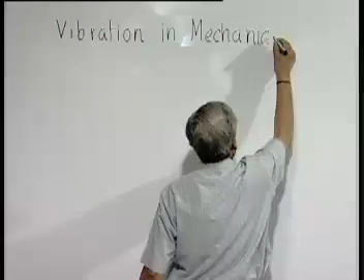Now you may ask why it is necessary for us to study this fluctuating or vibratory motion, because we have more or less taken care of the various dynamic effects and only some residual amount is left. So let us first establish why it is so important to study the dynamic characteristics of mechanical systems, or vibrations in mechanical systems.

Let us consider a particular case, say a simple cantilever beam. It has a length L and cross-sectional area B by H, where H is the thickness and B is the width. And this is subjected to a static force.

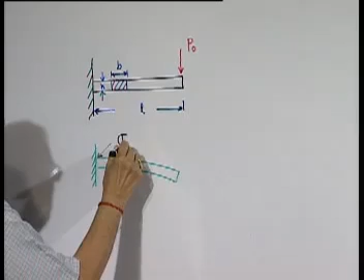What will be the effect of this static force applied at the free end of the cantilever? We all know that it is going to deflect, and it will be something like this. Now, in this deflected position, what happens? We know that this outer, upper layer will be subjected to a tensile stress, and the lower one will be subjected to a compressive stress. We also know from our study of solid mechanics that this is the location where the stress magnitude will be maximum, say it is sigma 0.

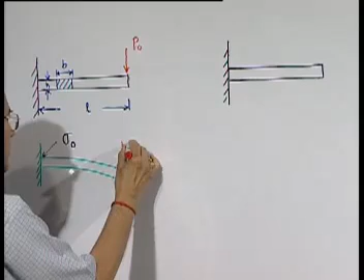Now what do we do next? We take up a case where the same beam is subjected to a dynamic loading. But before we take up this comparison, let us also find out the situation where you want to design this cantilever beam.

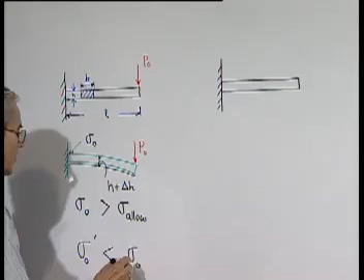Now what happens? Normally from our design procedure we know that the maximum stress developed here is sigma 0, and let it be so that in this particular case it is more than the maximum allowable stress for this material. So from our experience in simple machine design courses, we know that the simplest possible way to take care of this will be that rather than having a beam of height h, we may slightly increase the thickness. With this increase in thickness, this new stress developed will be something like sigma prime, and we know that it will be less than sigma 0. So if we add enough thickness to this beam, we can reduce this stress, bring it below the maximum allowable level, and that will be an acceptable design.

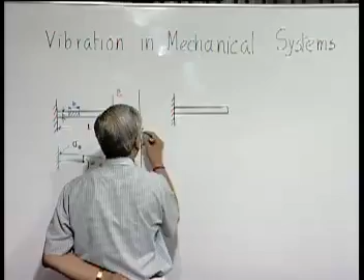That is the static case. Now in the dynamic case, as we have started showing, it is the same beam, meaning it will have the same length, any length of course, thickness h, and say now that the load is fluctuating. Take the simplest possible case, say like this. It need not be cosine, it could be sine, it could even be non-harmonic, but it is a fluctuating force.

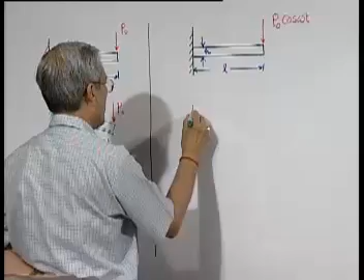Now if we try to take our experience from here and say that the response of the cantilever beam to this fluctuating force will be like this, that means it will have a lowermost and uppermost position, because we are subjecting this to an oscillatory force. Actually this will also be oscillatory. So what will happen in this case is that this point will be subjected alternately to a tensile stress when it bends like this, and a compressive stress as it bends like this.

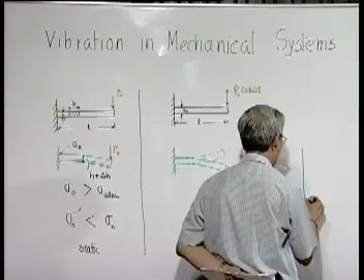So we can now plot stress with time, and it will be something like this: the highest level is say sigma 0, alternating compressive and tensile, because now this also becomes dynamic, time dependent. Now suppose we find that sigma 0, the maximum stress developed, is more than the allowable sigma of that material. So obviously this design will not do, and what we may try is to increase the thickness a little bit, as we did in the earlier case.

By an amount delta H. And we expect that the new stress, that means sigma prime, with this increased thickness will be something fluctuating but with a lower value. But it may happen in fact

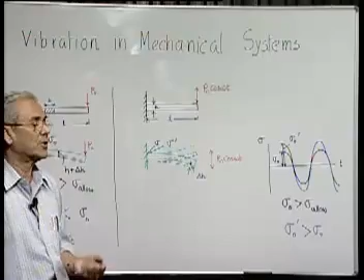So the behavior or the pattern of the characteristics of a system when subjected to dynamic loading may be very different from the case or the situation what we find with static loading. And that is why it is very important to study dynamics of such systems or mechanical vibration in a special way. We cannot extend or extrapolate the results obtained by static analysis into the dynamic case.

Apart from this, you will find that there are cases and situations where in a machine vibration is deliberately introduced. You have seen that mixing of concrete or some such mineral processing industries, that a vibration is generated to achieve the desired result. And so we should also know how to produce vibration, how to control it. So there are some useful applications for vibration, and thus a comprehensive study of vibration in mechanical systems

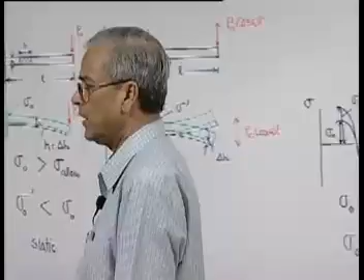becomes also necessary to design such systems. Before we take up the study of vibration in a very methodical, systematic manner, it is desirable that we have a bird's eye view of the whole situation. That means how many types of vibrations are there and what are the types of systems which vibrate, or the classification of systems from the point of view of vibration. We will all look into these things.

So therefore, let us consider the case where now, the classification of vibration can be done from various points of view. So the most common and important classification is like this. This is based on how the vibration is originated, or the nature of vibration. So this is a very common classification, but it does not show all the various possible variations in the characteristics.

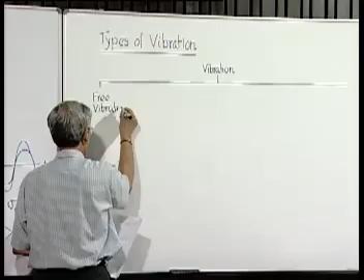We will see to that. First type of vibration is called free vibration. Free vibration means a system has been disturbed from its equilibrium stable position, and then it continues to oscillate for some time. We know, you take a pendulum, we displace it from the equilibrium position, leave it, it oscillates. But that oscillation is without any disturbing agent acting on it, and that is why we call it free vibration.

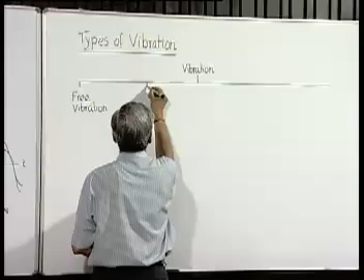Next type of vibration is forced vibration. In forced vibration, the body or the system is subjected to a dynamic loading, a force or moment which is fluctuating with time, and as a result the system also vibrates. So the cause of vibration is present, let me say dynamic force or dynamic moment is present. So they are called forced vibration.

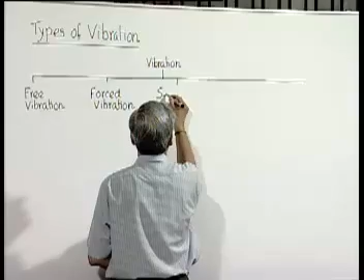There is another type of vibration which is neither free nor forced. What I mean to say is that this vibration needs an external energy, but it is not required to make the system vibrate by a dynamic force. Even I am talking about vibration of the vocal cord—there is no dynamic or fluctuating force which is acting on the vocal cord,

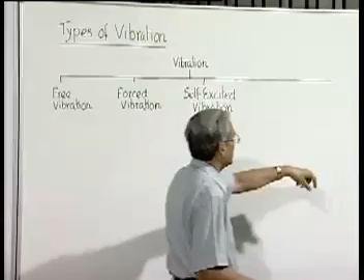and this type of vibration is present in many cases. That means when you scratch something, it gives a screeching sound. It means that it is vibrating, but it is vibrating not because a vibrating force is acting on it, but due to the system characteristics. So I cannot show it here. May not be possible to show here.

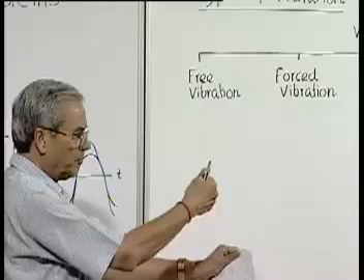That kind of vibration, like say the bow of a violin, you pull it to one side, but the string vibrates. Sometimes you write on the board with chalk, and there are situations where it will give a screeching sound. The same thing happens when you are pressing the reed of the harmonium and pressing the bellow.

It vibrates. There is a reed which vibrates at its natural frequency. So all these are examples of vibrations due to an external source of energy, but without the need of a dynamic vibrating force. There is another special case of vibration.

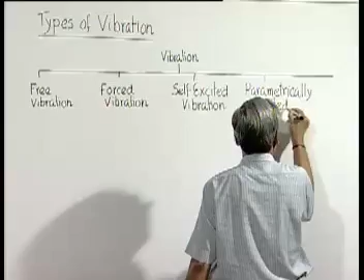It is somewhat similar to self-excited vibration. Here what happens, one of the parameters, we will discuss the parameters of vibration very soon, one of the parameters is dynamic. There is no vibrating force acting, but say the stiffness of the system is fluctuating with time. Now that is a situation where again the system may vibrate, and these are called parametrically excited vibration.

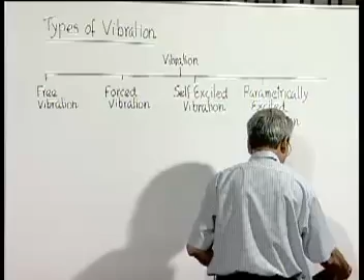I think there are some other types of causes, but they are very special, we will not discuss those here. These are the kinds of vibrations based on the source of energy. So no source of energy, it is free. There is a dynamic force. There is no dynamic force, but there is a source of energy acting on it. Here there is a dynamic variation or time variation of one of the parameters of the system. So these are the commonly found vibrations.

Next type of classification will be based on nature of dissipation. That means what about the energy, whether it is an energy conservative system or not. So in such cases, again we can classify it.

One can be undamped vibration, which means the total mechanical energy in the system remains conserved. There is no method by which it is being either reduced or increased, whatever the case may be, but the total energy remains conserved and there is no dissipation.

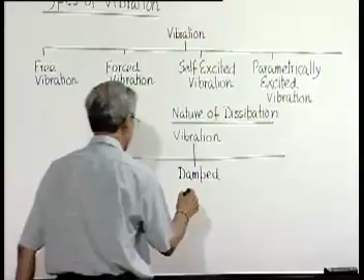There is another case which is, of course, in nature, which is more feasible: damped vibration. Now damped vibration means that energy is reducing. So in this case the vibration continues, but in this case the vibration is reduced, which is what normally we find.

Now damped vibration can be again classified into two. One is viscous damping. This is the nature of dissipation, which is generally based on fluid friction. We will discuss it in details.

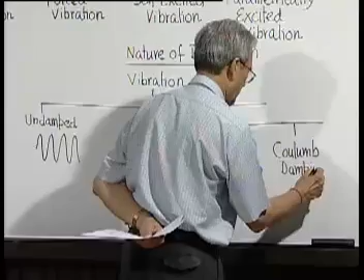Or it can be Coulomb damping, where there is solid friction, that means friction between two solid surfaces rubbing against each other. There also energy is dissipated, and that type of energy dissipation is called Coulomb damping, and the other is material damping.

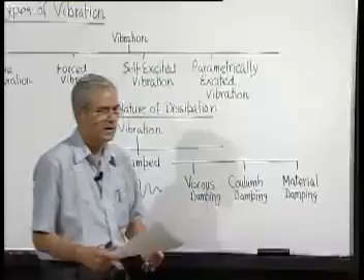It means, or we can see, that if we take a piece of beam in space where there is no fluid, no air, and we just vibrate it and leave it in space, we will still see that slowly the vibration will reduce. There are internal mechanisms within the material, just like hysteresis. It is also called hysteretic damping, and the rubbing of grains and other crystal boundaries involve a certain amount of energy dissipation. Energy dissipation means that the mechanical energy is converted into the worst form of energy, that is heat. In most cases, sometimes a little bit of that is converted to sound also.

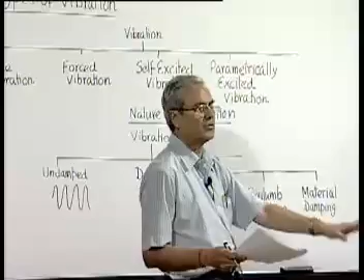That means that this mechanical energy is being converted into other forms. So therefore vibration problems can be handled according to the nature of energy dissipation present. Next classification we can have based on the nature of the vibrating system. Nature means complexity mostly.

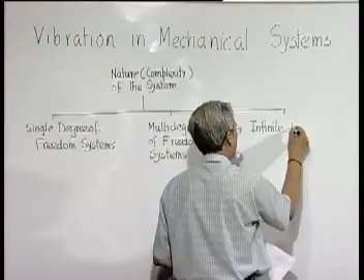So we will see, first we can have single degree of freedom, we will explain later. Then we can have multi-degree freedom systems. And finally, infinite degree of freedom, or these are called elastic bodies.

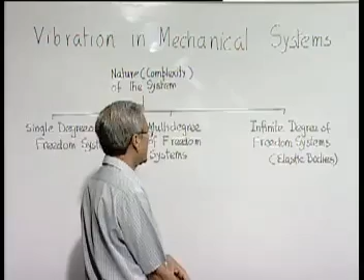So the system complexity can also vary, that it can have a single degree of freedom system. Now single degree of freedom means that, as we know from our kinematics, only one independent quantity is needed to describe the configuration of the system. Multi-degree freedom system means more than one such independent quantities are required to specify the configuration at any instant, and here we require infinite number of independent quantities, or it is a continuous infinitely variable body, and all we can say is elastic body.

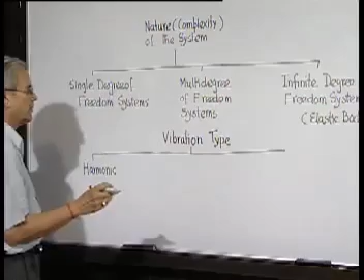Then we can have a classification based on vibration type. We now go directly into the nature of the time varying function. So it can be simply harmonic vibration, meaning a trigonometric function, sine function or cosine function, a harmonically varying quantity. That means any parameter representing the vibration varies harmonically.

Next is anharmonic but periodic, or we can say periodic but anharmonic. It is not a harmonic function of time. So in the first case, it is simply a sine or cosine function. Here it could be something which is periodic but not harmonic.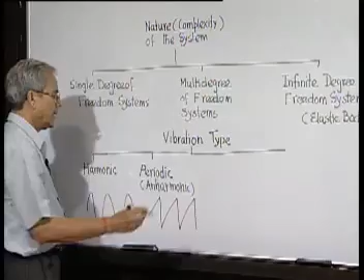Next is random. Of course, we are not going to discuss it, but the chaotic vibration is also very important, but we will definitely not have the chance to discuss that chaos and chaotic phenomena here. And finally, we will divide or classify vibration another way.

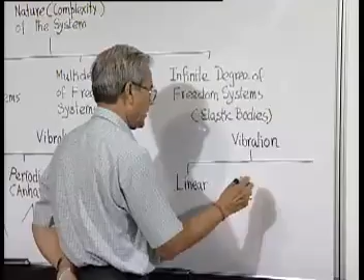Based on the system parameter characteristics, if the parameters are linear, we call it linear vibration. Here we call it the non-linear vibration. That means again it is based on the system.

So these are the various ways these vibration phenomena can be classified or grouped. Because this overall view can help us when we take up this study, we should start from the simplest and gradually go to more complicated cases.

I think now let us look into the basic elements and the fundamental properties essential for a system to be of vibrating nature. Everything is not capable of vibration. Say for example, I take this and it is not vibrating. I take a football, I just kick it, it just goes, it does not vibrate.

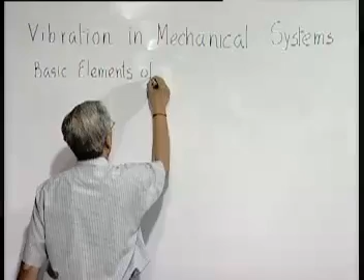But I take a pendulum, displace it, it oscillates. So therefore, I think there are some essential qualities required for a system to have the capability to oscillate. So the basic elements of a vibrating system - what are the basic elements?

Now, why does a system vibrate? Most important thing required for a system to have the capability to vibrate is that it must generally have a stable equilibrium position. That means a position where it stays if not disturbed, and it comes back to it if disturbed.

That means if I have a body, and this is its equilibrium position - stable equilibrium position.

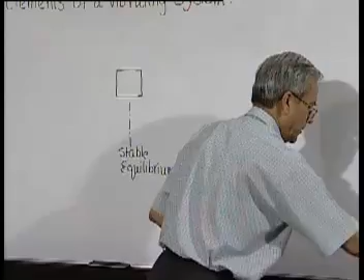Now, what happens if I disturb it? Say I push it to one side, I push it to this. Since it is a stable equilibrium position, it will try to come back. So therefore, it is essential for the system to have a capability to come back to the equilibrium position. That means its original position will be restored.

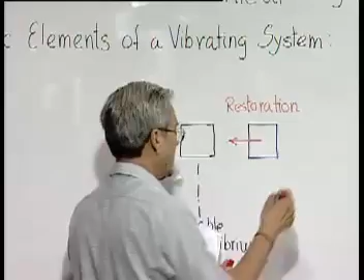So this property is called restoration. That is essential. Suppose if you take a ball, you keep it here, I displace the ball, it remains there. So that will not do.

But if it is on an incline or in a curved plane, like a ball or cylinder, then if I displace it, it tries to come back. There is restoration - that can oscillate. But on a flat plane, if I take a cylinder, it will not oscillate. So this restoration, a property which always brings back the system to its original stable equilibrium position, is essential.

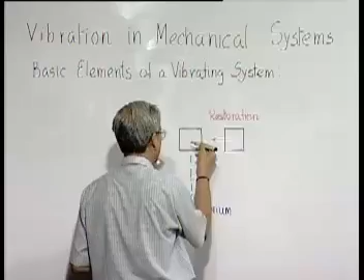Next, what happens? When it comes here, it picks up velocity and it comes here. But since it has a non-zero velocity, it has inertia, and so it shoots beyond this original equilibrium position, overshoots it, and goes to this side.

This overshooting is possible - why? It is because of the inertia of the system. That means it must possess some definite capability to continue in this state of motion, which is a velocity when it comes to this, to continue in that, which means inertia. And without inertia, it will not overshoot.

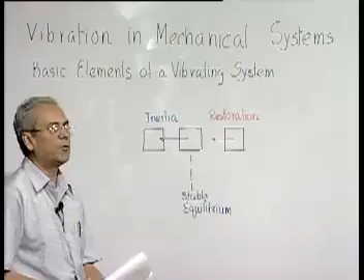So therefore, as it overshoots, obviously restoration starts acting on it in the opposite direction. So it will gradually come to a stop and come back to the position. But when it comes here again, it has a velocity and it will overshoot and go to the other side. And this keeps on happening - just like a pendulum.

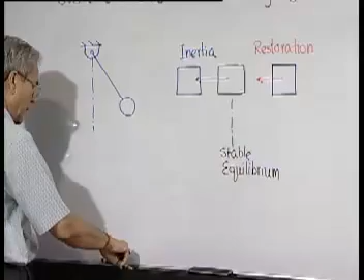Now here the pendulum comes back to its original position because there is gravity - this force is acting. If you go to space and make a pendulum, you displace it from one position, it will remain there. It will not oscillate. So the presence of this gravitational pull towards the surface or center of Earth provides the restoration, for which it tries to come back to its original equilibrium position.

But when it comes here, because of a finite inertia, it possesses some momentum, it overshoots the other side. But then obviously it comes to a stop because it is being acted upon by the restoration, and then comes back. And this whole process continues.

If you consider a situation where there is no inertia, mass is zero, then restoration brings it back here, but when it comes here, there is no restoration, no force acting, and since there is no mass, there will be no inertia - it will remain there. So these are the two essential parameters or properties of a system required to make the system capable of oscillation and vibration.

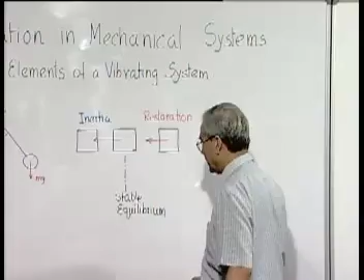However, there is another parameter which is not necessary for a system to have vibrating capability, but nevertheless all practical systems will have that property - that is dissipation.

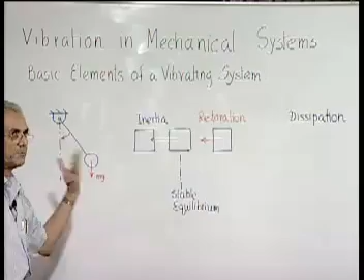By dissipation I mean that the mechanical energy which we put into the system when we displace it from its equilibrium position gradually gets dissipated to the surroundings by various methods. There may be air friction that dissipates energy, or solid friction in a hinge that dissipates energy, and so on. So though this energy dissipation is not essential for a system to be vibrating in nature, it is present nevertheless all the time.

So there will be three parameters which will play the predominant role in any oscillating system: inertia, restoration, and dissipation.

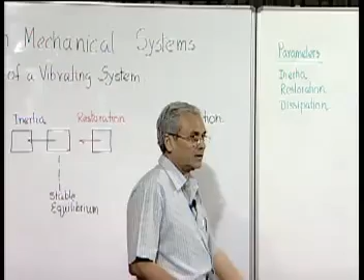In common language, this we call the mass or moment of inertia if it is angular motion. This we call the spring stiffness in case of elastic systems, or gravitational pull in case of gravity-based systems, and this is the damping, which is the common language for describing dissipation. So these are the three fundamental parameters of any vibrating system.

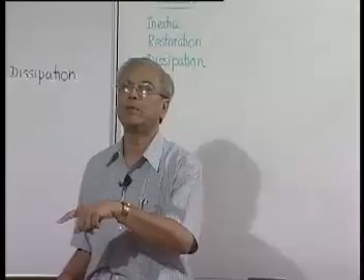Now how do we handle vibrating systems mathematically? Whenever you solve a physical system mathematically, the first thing we do is develop a mathematical model. Whatever may be the branch of engineering or science, whenever we write an equation to describe the behavior or characteristics of a physical system, we are not really doing it for the actual system, which is in general infinitely complex.

if we go to the molecular level or subatomic level. What we do is make an approximate mathematical model which more or less behaves in a similar way as the actual system, and we only solve the mathematical model. So here also exactly that is going to happen. When we try to solve the vibration of a mechanical system, we don't solve the actual system, we actually write down the equation of motion for the mathematical model that we develop.

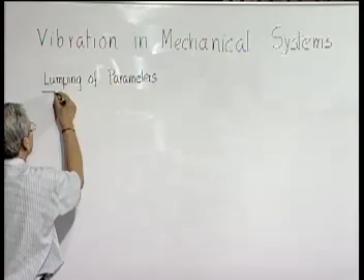So the next thing we have to understand is modeling of a system. The most important, or rather basic, idea behind mathematical modeling in case of a vibrating system is lumping of parameters. And the models we develop following this principle of lumping of parameters are called lumped parameter models.

What is lumping of parameters? As the language indicates, these are the important parameters, and we lump them. Now in a system, say for example, take a cantilever beam with a heavy weight at the end.

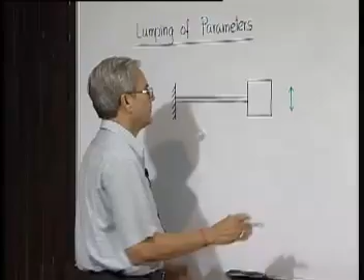Now this is a vibrating system. If we disturb it here, it can oscillate like this - the whole system oscillates. Now here, where are these parameters located? Say this system obviously has inertia. Now where is that inertia present? In reality, you can say that every particle of this which is moving has inertia, so therefore inertia is distributed over the whole thing.

But from our common sense, engineering common sense, we know that this particular beam has a mass which is much less compared to the mass of this block, and the predominant job of this cantilever spring is to provide restoration to the system. That means if we displace it from its equilibrium position, it comes back to the original equilibrium position, and that is the job being done by this.

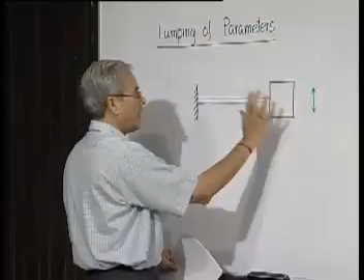What this block is doing - of course, a block is also not a 100% perfectly rigid body, it also has a certain degree of elasticity, but it is so rigid that its elasticity is negligible, so its predominant role is just to provide inertia. That means here we find that this is providing inertia, predominantly the mass, this is providing the restoration or acting as the spring, and the dissipation which is going on because of the material damping in the beam undergoing distortion and friction with the surrounding air - all these things are causing dissipation.

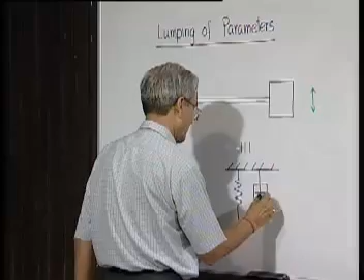Now what lumping means is that we can say this system is more or less equivalent to - so here we have lumped the parameters. We have lumped the mass as m, lumped the stiffness of this as spring k, and the dissipation by a dashpot.

We will come to these things very soon. So therefore, as we see that...

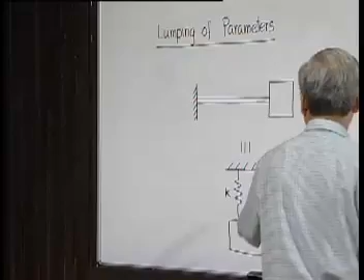In general, what we will do in a mechanical system is extract the basic function or basic property of that part. It means who is providing, or which part is providing, predominantly the inertia. Like that, this is providing predominantly the restoration, but it has nevertheless inertia also. It also has some dissipating capability because of its hysteretic damping, but its main job is to provide restoration. So that's why we call this the spring.

This also has internal damping, it has certain amount of stiffness, and it has predominantly inertia. Its primary job is to provide inertia to the system, like that. So this is precisely the principle of lumping of parameters, and therefore this is the actual system and this is...

The lumped parameter system. Now before we take up more such cases, we should just have some little idea about these parameters. Inertia means it will be a mass when the movement is linear, or it can be a moment of inertia I when the motion is rotational.

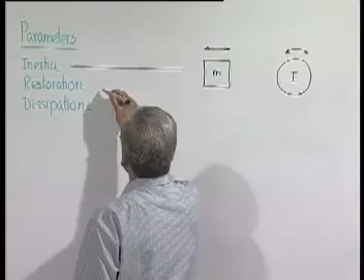Restoration similarly can be simply a spring, or a torsional spring. This is a linear spring. Here it is like this.

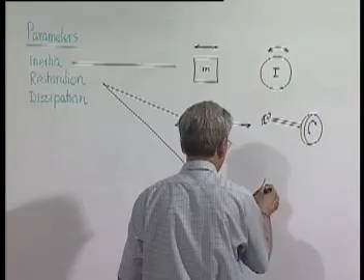Restoration can be gravity based, we have already seen, not necessarily elasticity based. So we can have a basin like this in which this is oscillating, or this also is oscillating on a horizontal surface.

Similarly, dissipation again can be two types, as you have seen. One is simply the fluid based. What this does: there is a piston with some narrow holes, and that piston moves in a cylinder, and it is completely filled up with a viscous fluid.

So when we pull it, what happens? This side the fluid goes through these holes to the other side, and during that process it provides adequate amount of friction, and that is fluid friction, which is proportional to the velocity. The other kind of dissipation of energy could be simply, and this is represented symbolically by this symbol.

This is called viscous damping or a dashpot. There can be solid friction, as you know.

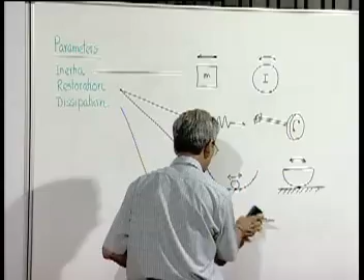Here there will be coefficient of friction mu. The solid friction is represented by this symbol, and here the force is F. Here of course the force will be C into velocity, if V is the velocity. Here it does not depend on velocity, it is constant because it is solid friction.

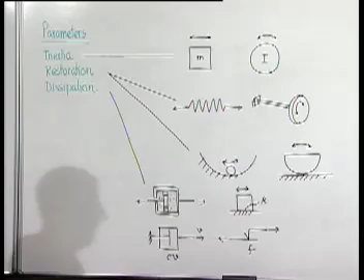So these are the kind of parameters we have. We have dissipation, primarily of these two types. Material damping we cannot show, it is hidden inside the material. Restoration can be primarily elasticity based or gravity based in most cases. Inertia can be a linear inertia represented by mass, and rotary inertia represented by a flywheel or a rotary cylinder.

Here the stiffness is called k. Here torsional stiffness is given by this. Torsional stiffness sometimes can be a coil spring also. Here also it is angular motion which is resisted by this coil spring. Here it is the gravity, and these are the dissipation.

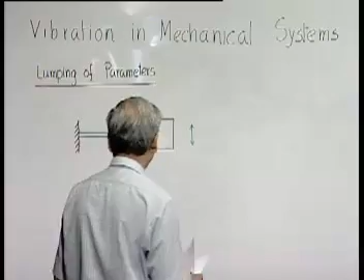So lumping of parameters, what we have been discussing, is important because only once we have lumped the parameter can we talk about forming an equation of motion, whatever we may say, that is the mathematics or the equations relating to these properties K, M and C and the displacement coordinate.

We can derive some relationship between these, or among these, which we solve and tell that this is the system's response. Now of course one thing is correct: sometimes suppose if we have a thin steel spring like this and a mass at the end, we can tell that fine, this is the mathematical model. We can have an example from the angular case also. But suppose if we have to consider...

The vibration of a beam itself, a cantilever beam, like a reed. So you displace it, it vibrates. Then how do you do lumping of parameters? It becomes very difficult, as you can see, because all the properties have been smeared into one body.

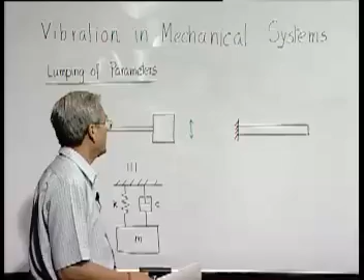Inertia is there all over, distributed. Restoration is provided by the whole body's elastic properties, and dissipation also is predominantly distributed within it in the form of hysteretic damping, though there may be some damping when it moves relative to the surrounding air.

So in such cases it is of course not possible to do lumping like this and get results, though sometimes some very crude approximate models are developed. So therefore we have to identify which part of the body's predominant property is what. Like, say for example, there may be two such cases, like say if we have this, and maybe another one.

Then very obviously this part will be modeled as this without the damping if we neglect it, and this part will be described by another one. So modeling will be like this.

Another important question you have to keep in mind while developing the model is how accurate it should be. Some people can model it like that, we can divide it into 4 and each one we try to represent by a spring mass system. So there will be in series 4 spring mass systems. It will give some result which will be near to this, but obviously not exactly equal to the actual beam.

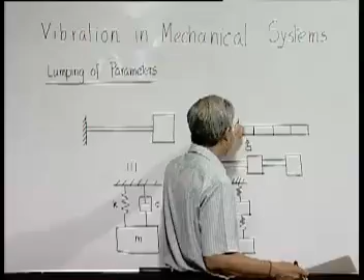But if you divide into more number of sections, obviously the result is going to be more accurate. So therefore, if we want to make the model very accurate, representing the original physical system in a very faithful manner, then it is going to be more complex. The solution will be more difficult, but the accuracy of the result also will be definitely much better. So it is always a kind of give and take.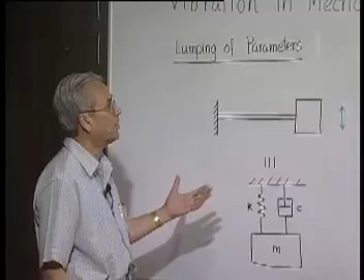It's a balance which one has to strike, how accurately the result is desired, and based on that we should develop the model. If the result required is not necessarily very accurate, it is pointless to go through the horrendous task of a very accurate model with lots of complexities and spending a lot of computational time solving the system. So therefore, we should always find out how complex or how accurate the model should be.

Another important thing we should discuss at this stage is the degrees of freedom, which I mentioned. It is coming again and again, so I think it is better to discuss here. The idea behind the degrees of freedom is known to you all I am quite sure, but again we will just quickly revise our memory or refresh our memory.

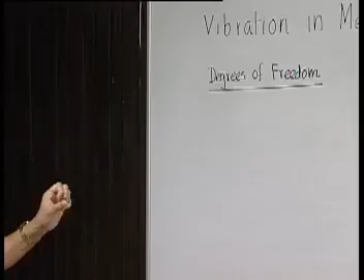This is related to our modeling, because if we don't require very accurate results, in most cases when we do the parametric modeling, we can try to get the simplest possible single degree of freedom system mathematical model. They are the simplest things. So therefore, let us see what these degrees of freedom are. Now, degrees of freedom are the number of independent quantities required to describe a system's configuration.

So a simple thing which is equivalent to this, only one quantity is required, the displacement of the mass from its equilibrium position. So it is a single degree of freedom system. If this system is something like this, obviously we have to specify the displacement of the two masses, and it will have 2 degrees of freedom. So degree of freedom in this case was 1, in this case it is 2.

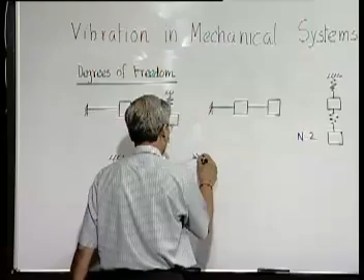And say for example, similarly a gravity based system also you can consider. Say pendulum, we have to only give theta, only one quantity to specify its configuration. It is a single degree of freedom system, but if there are 2 pendulums joined like this, then obviously we have to specify both theta 1 and theta 2 independently, and the number of degrees of freedom for this case is 2.

In case of elastic bodies, like say a beam, when it deforms, it can deform in any manner, and to represent a deformation, you have to express the displacement of an infinite number of points describing this beam, and therefore in such cases n is going to be infinity, or these are continuous bodies.

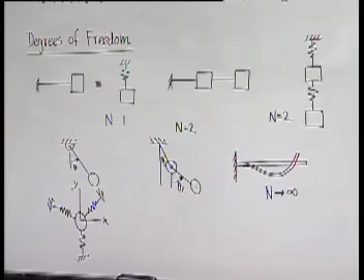Sometimes it is not necessary that one has to have more than one lumped body to have more than 1 degree of freedom. If we take an object moving in 2-dimensional space, say this plane of the blackboard, and it is constrained to move with the help of 3 springs, then if it is confined to this plane, even a single particle like this will require two quantities to be specified to give the exact description of the configuration. So it will also have 2 degrees of freedom, though there is only one particle.

Similarly, if this particle is resiliently supported so that it can move in 3-dimensional space, even a single particle will have 3 degrees of freedom. Sometimes, if rotational motion is also there, that means this supported by springs,

so here, if you select any point, say the center of mass of the body, then it will require 2 degrees of freedom to describe the location of the center of mass, and one more angular position, angular coordinate you have to specify to describe the orientation of this body.

So, though this is a single rigid body, in plane motion it will have 3 degrees of freedom. Therefore, the number of degrees of freedom are not necessarily associated with the number of particles, but in the most general case, one rigid body in 3-dimensional motion can have 6 degrees of freedom.

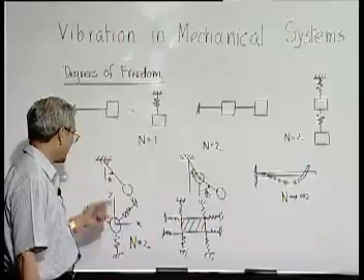A rigid body in plane motion can have 3 degrees of freedom, and a particle in plane motion will have 2 degrees of freedom if it is confined in a plane. However, in such cases, we confine their motion in one direction, like this is moving along a curve, circular curve. Here it is moving along a straight line. So, in such cases, they are not actually moving in a plane. Therefore, it has a single degree of freedom, as is very clear from this picture.

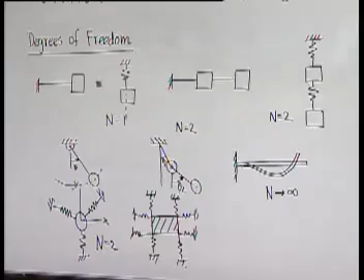So, when we do modeling of a system, another very important point emerges, and we should at least discuss this briefly at this stage. That means, what should be the nature of these parameters? So, we are again continuing our discussion on the lumping of parameters and mathematical modeling. The important thing in this modeling you have to also keep in mind is that...

So, if we take the case of a simple spring mass system, its equilibrium position is this, and its displacement coordinate, velocity and acceleration are x, x dot and x double dot.

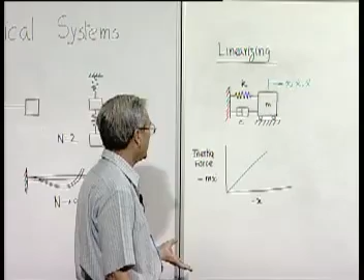Now, when the system moves, there will be 3 forces involved, as you will see. One is the force of inertia. If we plot with minus x double dot, which is minus m x double dot, obviously this is a straight line. We can consider it a straight line for almost all engineering problems, mainly because m remains constant. Unless we take the relativistic effect, which is absolutely unnecessary for most of the problems we solve in mechanical engineering, m is constant, and so the inertia force is a linear function of the motion parameter x double dot.

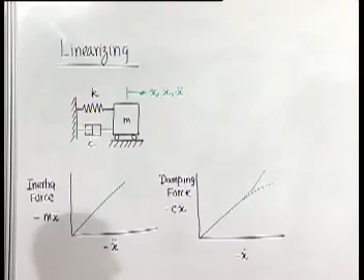If we take the damping force or dissipating force, which is minus c x dot, here again we can see that in reality it will be a straight line up to some time, but then after some time it may vary from the linear property. When x velocity becomes very high, it may not remain linear, that means the flow may not remain laminar and it may not maintain that linear dependence.

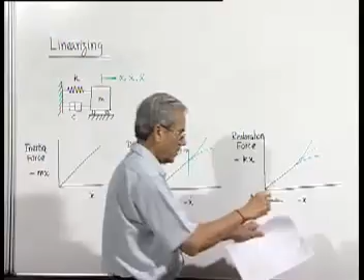So here you will find that we have a range in which it can be considered as linear. But if you go beyond that, then the parameter which represents the energy dissipation by viscous damping cannot be treated as linear. Finally, the restoration force again appears to be linear, but we all know that if we stretch a spring too far, then it tends to become harder and harder and harder.

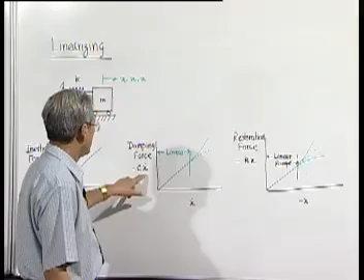So therefore, the linear relationship between the force and this stretch is only up to a certain point. So therefore, in reality, exactly speaking, none of these are linear functions. But when we develop the mathematical model, we treat the whole system as linear. That means k is constant, C is constant, this is proportional to x dot, this is proportional to x, this is proportional to x double dot, like that.

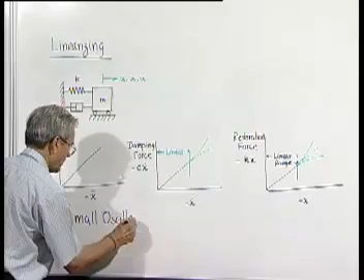They are all linear functions of the respective motion parameters. But in reality, none of them are exactly straight line relationships. But if we don't want to make our problem absolutely difficult, I think we can treat all of this as operating only in the linear range. And that is the case. Normally, when we solve problems, we have to keep in mind that the small vibration or oscillation which we are analyzing is of small magnitude, and that in most cases will rather justify our assuming the system parameters to have linear relationship with the respective motion parameters.

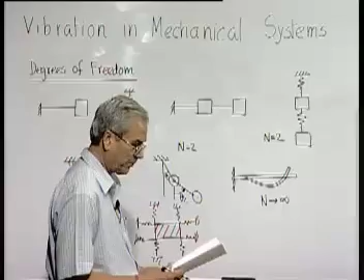We will now have to go to various other kinds of general discussions. One I think we will take up later, before we take up exact problems one by one. It is the type of excitation which we have already mentioned. It can be harmonic, it can be anharmonic but periodic, it can be self-excited, it can be base excitation, it can be force excitation, and of course it can be random.

So next session we will start solving problems and take up the problems one by one, starting from the simplest and going to more complex cases.